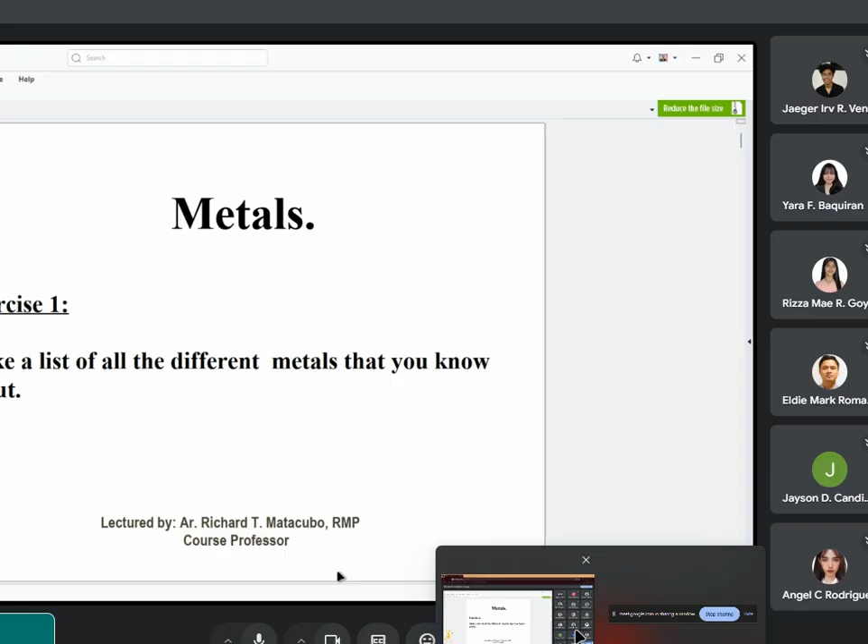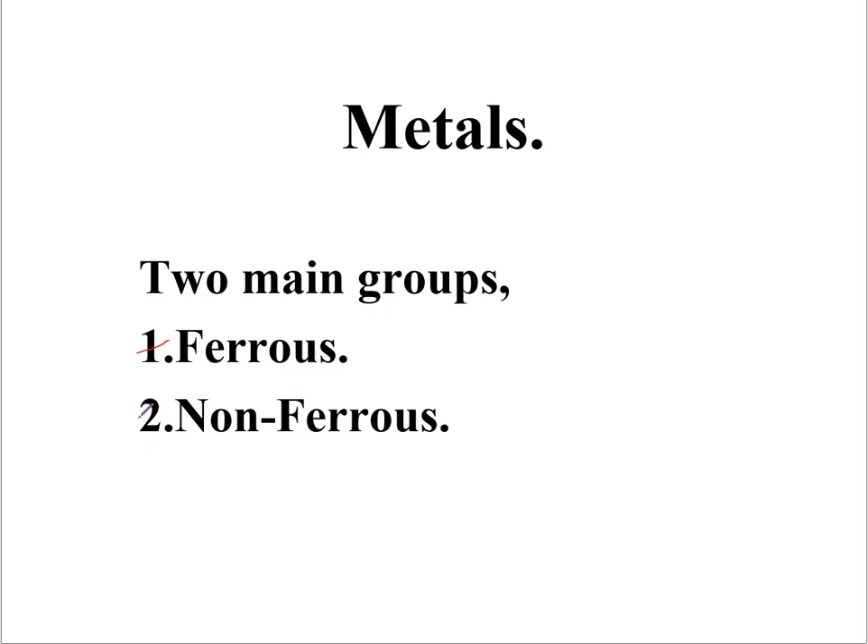Okay, let's start by setting up the information about metals. We have two main groups of metals: ferrous and non-ferrous. Each of these will be discussed one by one. Here is a very comprehensive diagram of compositions of metals.

Sa ferrous, yung pinaka description nun is, or another type of ferrous under its name, is pure ferrous metal and ferrous alloys. Ang example ng mga pure ferrous metals ay iron. At yung mga examples naman dun sa ferrous alloys is steel and high speed steel. So may mga discussion tayo dyan on the succeeding slides later on.

So we go to non-ferrous. We have pure non-ferrous metal as another type, and non-ferrous alloys. So under the pure non-ferrous metal, we have copper and aluminum, zinc and tin, lead and silver, gold and mercury. Take note that mercury is the only non-ferrous metal that is liquid at room temperature.

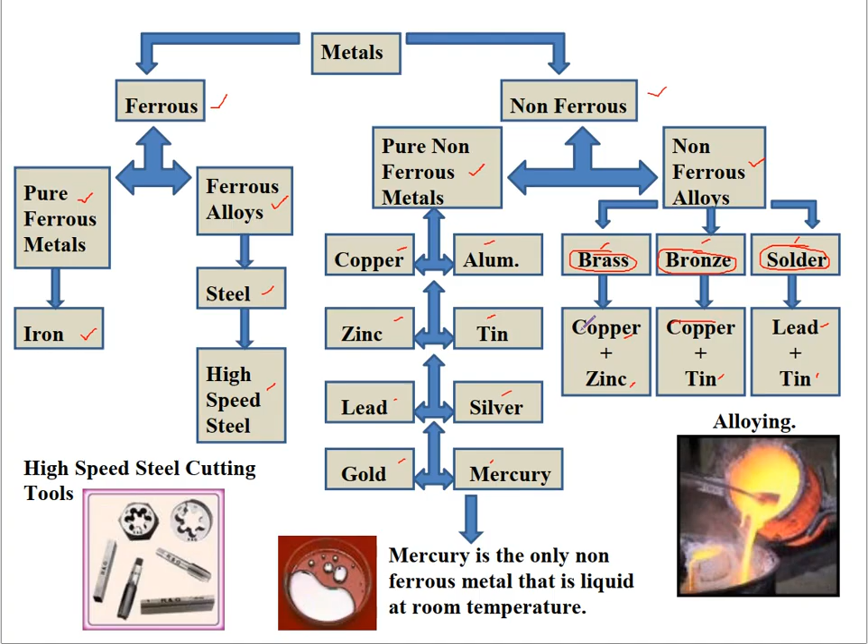Alright, so isa-isahin natin yan. Firstly, we have to define ferrous metals. Ferrous metals are mostly consisting of iron and small amounts of other elements, kasi it's a combination of different elements. Ferrous metals are prone to rusting when exposed to moisture.

So there's a reaction between the moisture and the metal. Ferrous metals can also be picked up by magnets, meaning ferrous metals are magnetic. The rusting and magnetic properties in ferrous metals are both due to iron, because mostly the composition of ferrous metal is iron.

It includes mild steel, cast iron, and steel. So examples are here: mild steel, cast iron, high carbon steel, high speed steel, and stainless steel.

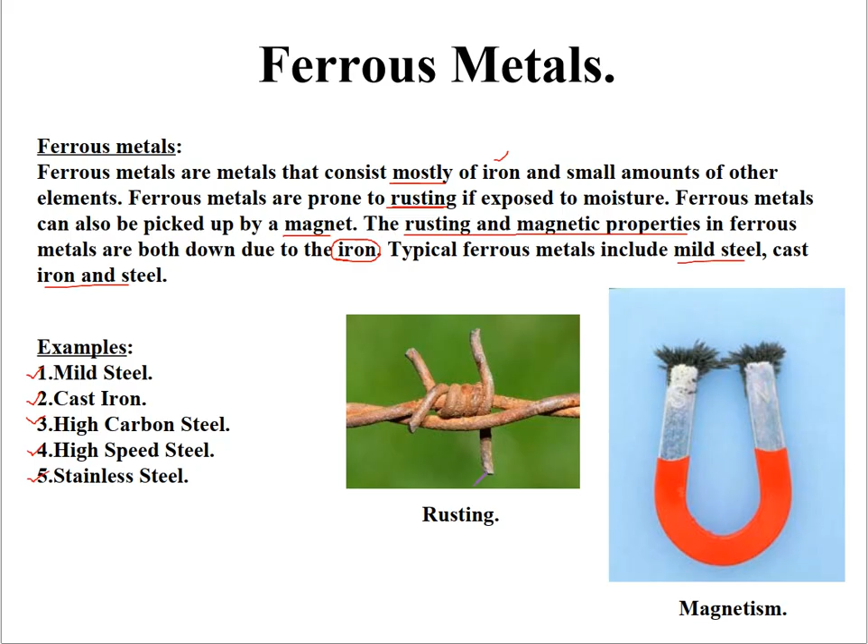So sa mga hindi pa nakakaalam, or probably nadaanan niyo na ito sa high school, rust is the product of rusting, which is the process of degrading a metal due to the reaction of moisture to steel. Ganyan yung itsura niya, yellowish, golden brown, something like that.

So we have different types of metals. Firstly, we have to discuss mild steel. Mild steel has several properties, like ductile and malleable. Pag sinabi nating malleable, you can shape it into something.

Malleable siya, medyo soft property and can be molded into something, especially pag meron kang molder. Mild steel will rust quickly if it is in frequent contact with water. Kaya yung ginagawa natin sa mga mild steel natin is tinitreat natin siya, nilalagyan natin siya ng mga coatings, red oxide, mga automotive paint, yung mga ginagamit natin for anti-rust na chemicals.

So the usage of mild steel includes several things, like nuts, bolts, building girders, yung nakikita nating I-beam at I-column, H-column natin. Yan yung mga mild steel examples natin for building girders, car bodies, gates, and other purposes. The melting point of mild steel is 1,600 degrees Celsius.

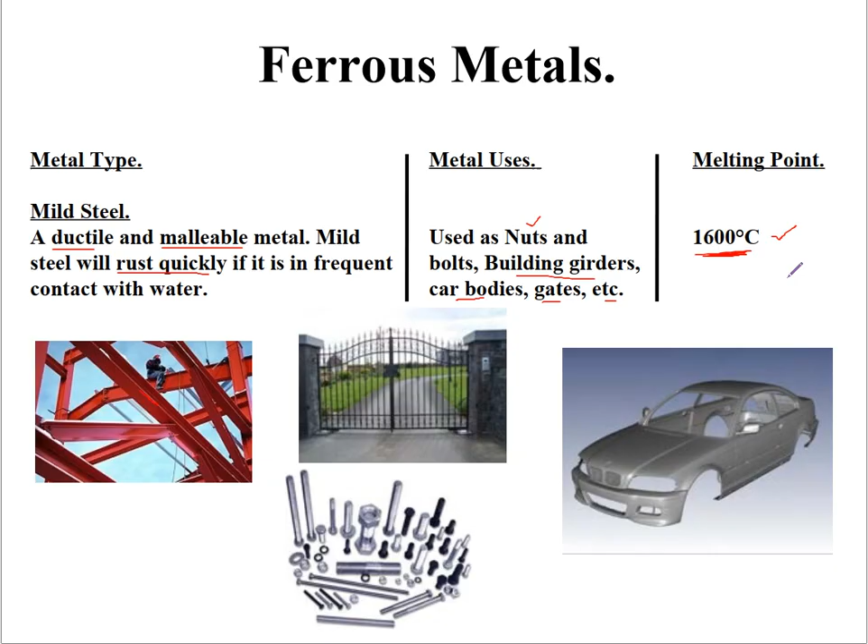Next on our list, we have cast iron. It is a very strong metal when it is in compression, but also very brittle. Pag sa compression siya, if you compress it, di ba dalawa yung forces natin acting in a body? Meron tayong compression and tension, di ba? Yung compression is pinipit-pit, yun, yung iniipit. Yung tension naman is yung hinihila, pahila, na forces. So cast iron is very strong in compression but also very brittle in some other forces.

It consists of 93% iron and 4% carbon plus other elements. Example natin dyan are car brakes, car brake disc, car cylinder, metal works, vices, manhole covers, machinery bases like the pillar drill, and the melting point is 1,200 degrees Celsius. Medyo mababa lang siya dun sa ating mild steel.

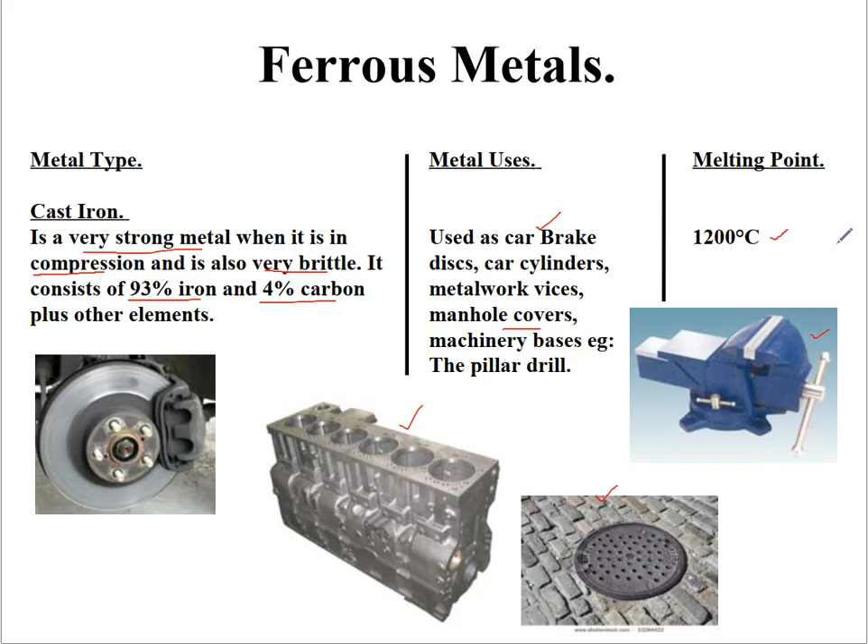Tama, mild steel pala. Next in our list is high carbon steel. High carbon steel is very strong, very hard also, that has a high resistance to abrasion, or yung paulit-ulit na hindi siya striking, kundi abrasion is pagkukuskus sa kanya. So properties is up to 1.5% carbon and very tough.

Kaya ginagamit siya sa mga tools, like for example chisels, screwdrivers, hammers, saw, springs and garden tools. And the melting point is 1,800 degrees, so medyo mataas na yan.

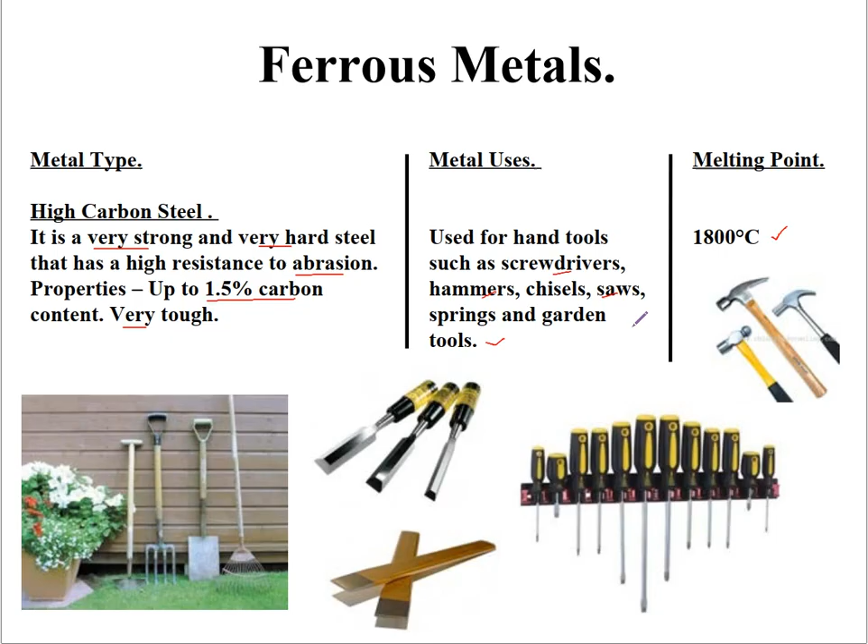High-speed steel, another type of ferrous metal. High-speed steel, or commonly known as HSS, is a metal containing high content of tungsten, chromium, and vanadium combined together, and that combination results in high-speed steel.

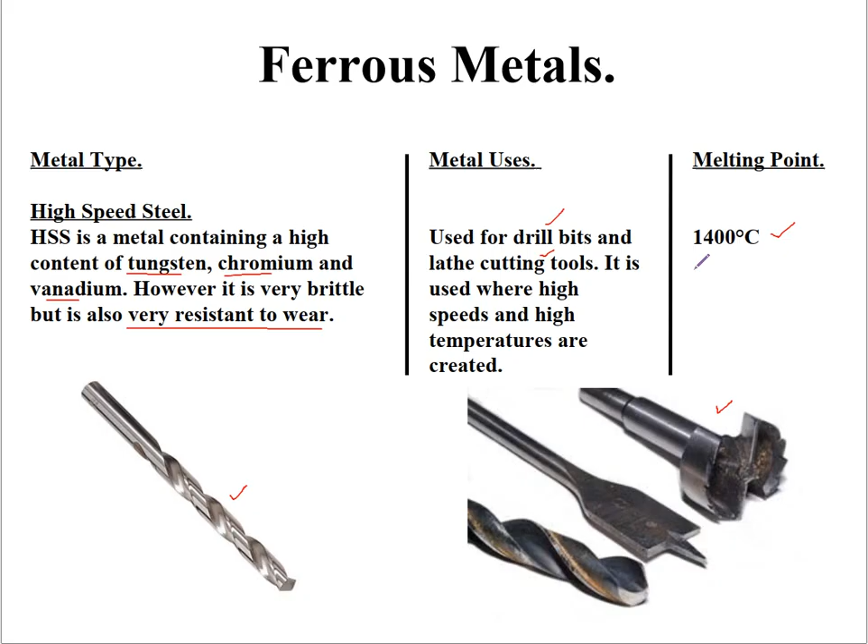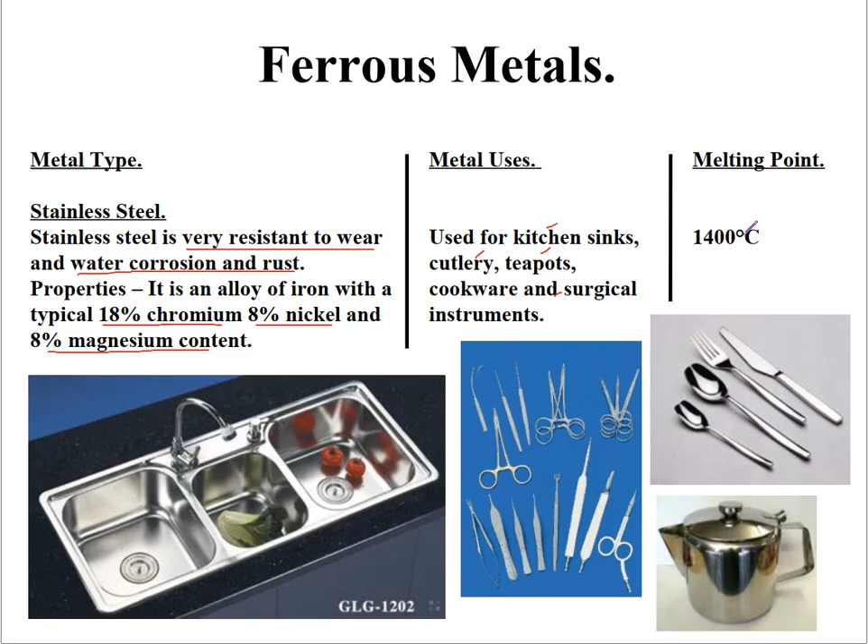Typical properties of stainless steel include 18% chromium, 8% nickel, and 8% magnesium content, with a melting point of 1,400 degrees Celsius.

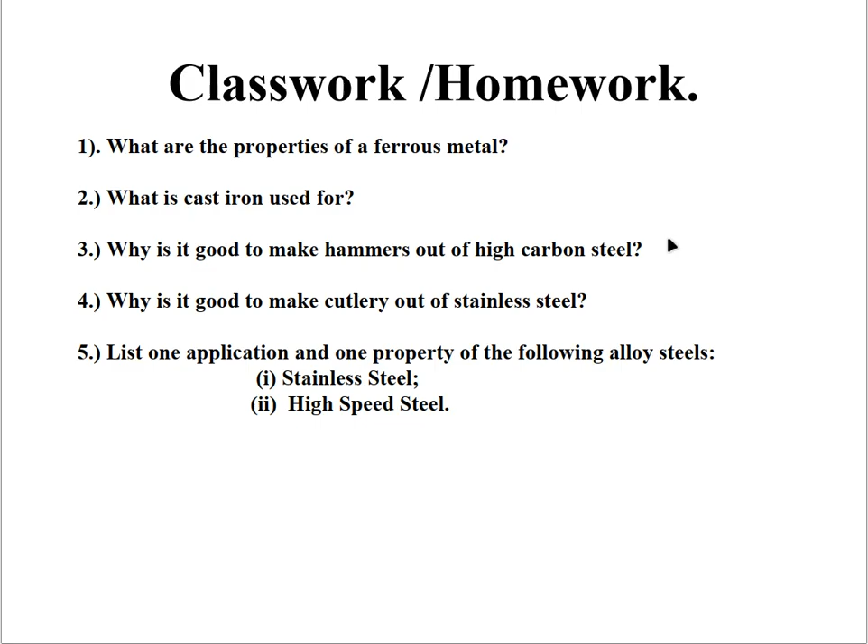But the downside is non-ferrous metal is expensive when used in construction. Still, they can be used if you want a high-end or low maintenance type of metal. It still depends on your application, because if you use non-ferrous metal on a structural member, it's not economical and not reliable.

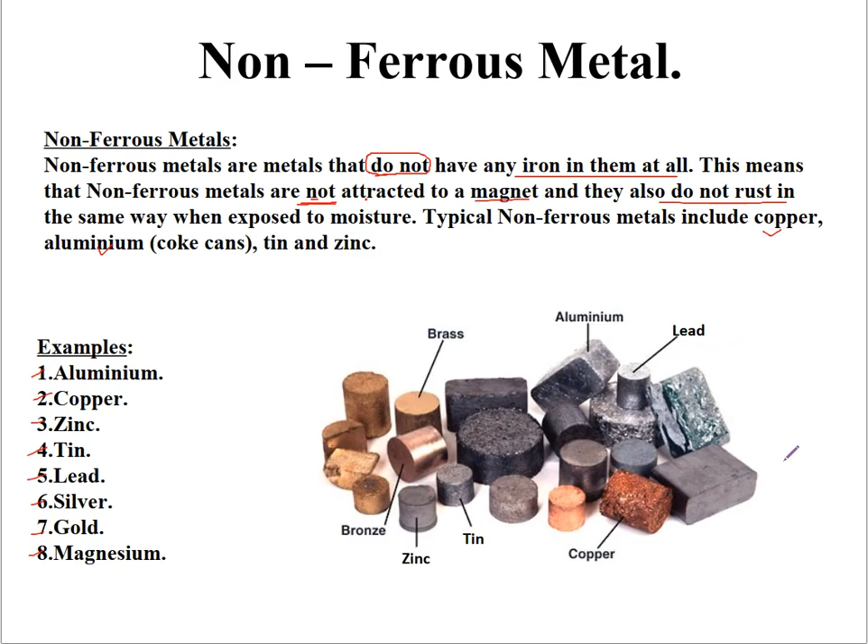So for complete examples: aluminum, copper, zinc, tin, lead, silver, gold, and magnesium. So we have examples here of what our non-ferrous metals look like.

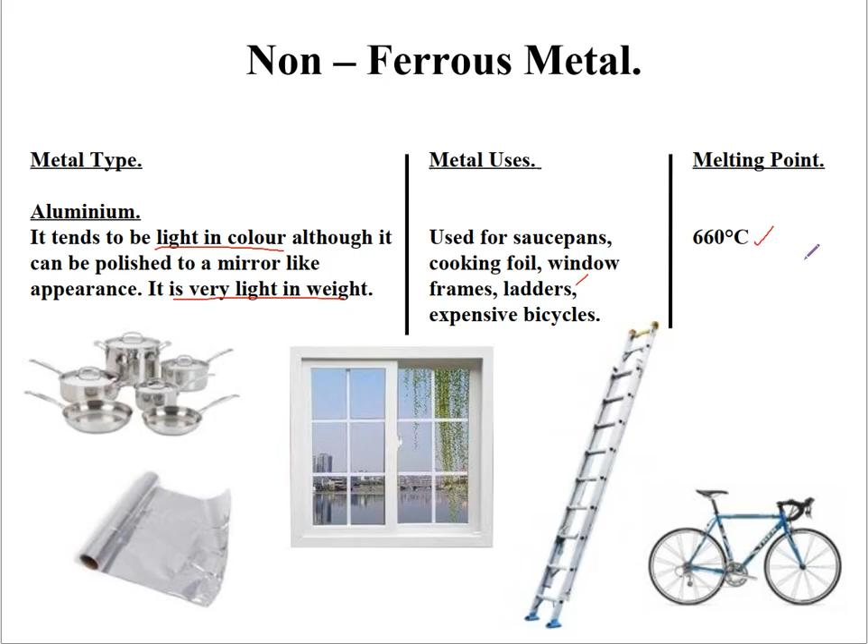First in our list, we have aluminum. Its main physical distinction is it's light in color. We see it in our cookware, cooking foils, window frames, ladders, and expensive bikes, since aluminum is usually lightweight when used on bicycles. It can be polished into a mirror-like appearance and is very light in weight, which is why it's used on bicycles. Melting point is 660 degrees Celsius.

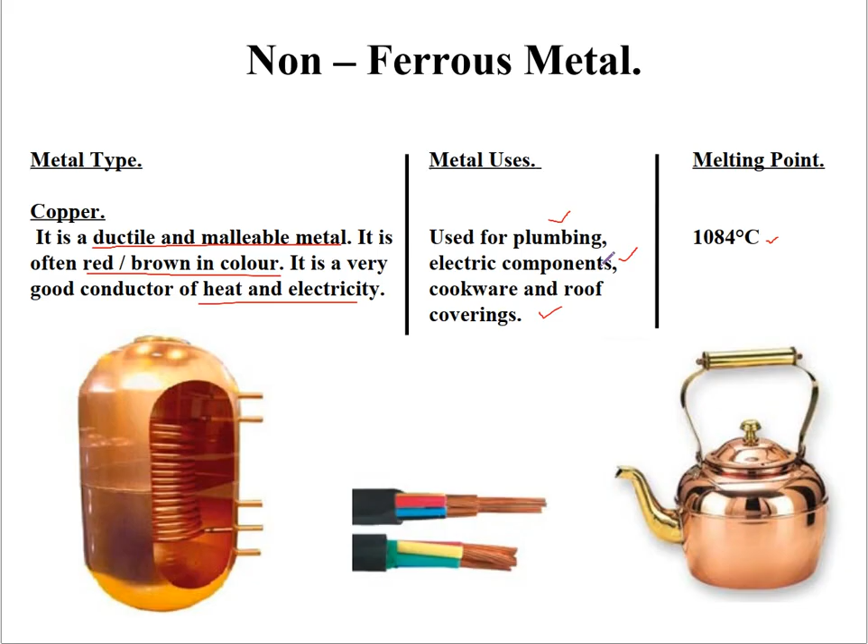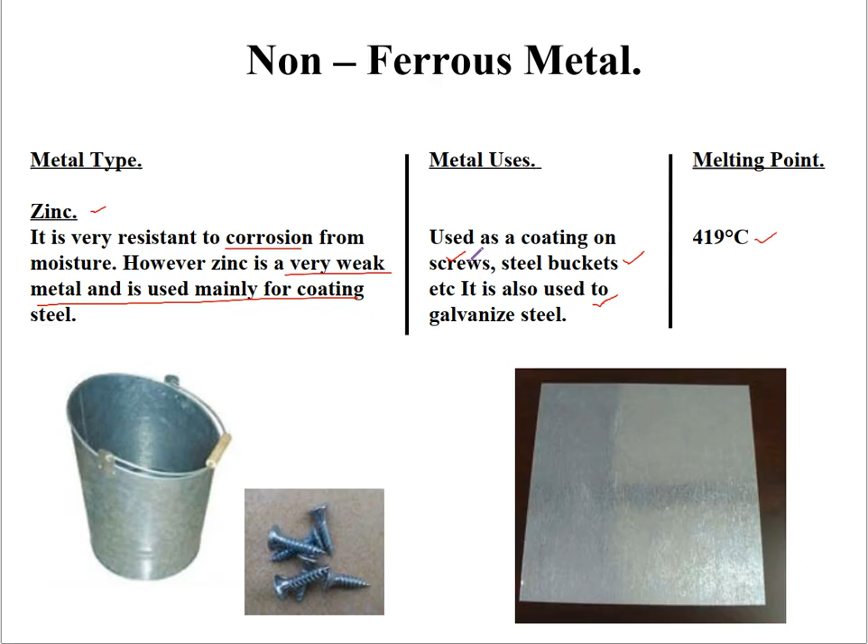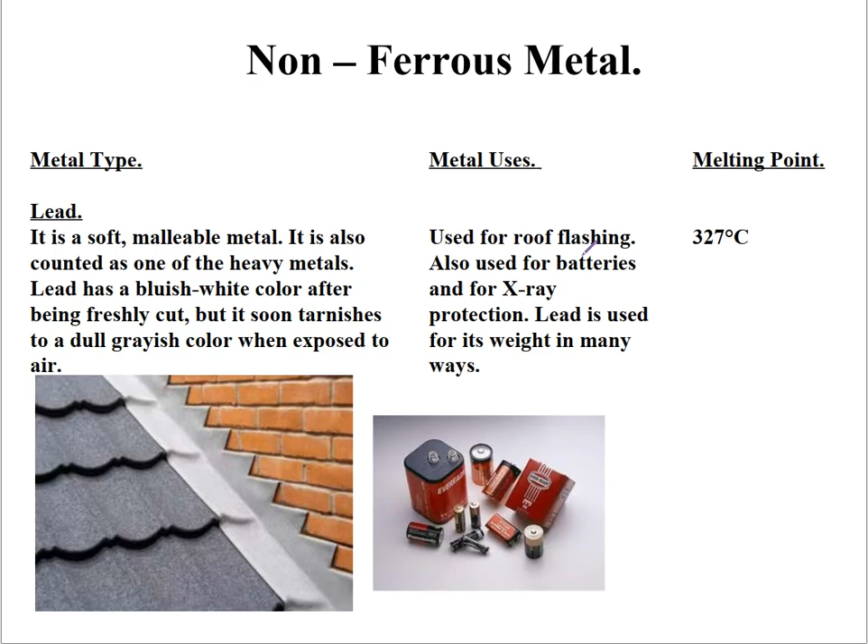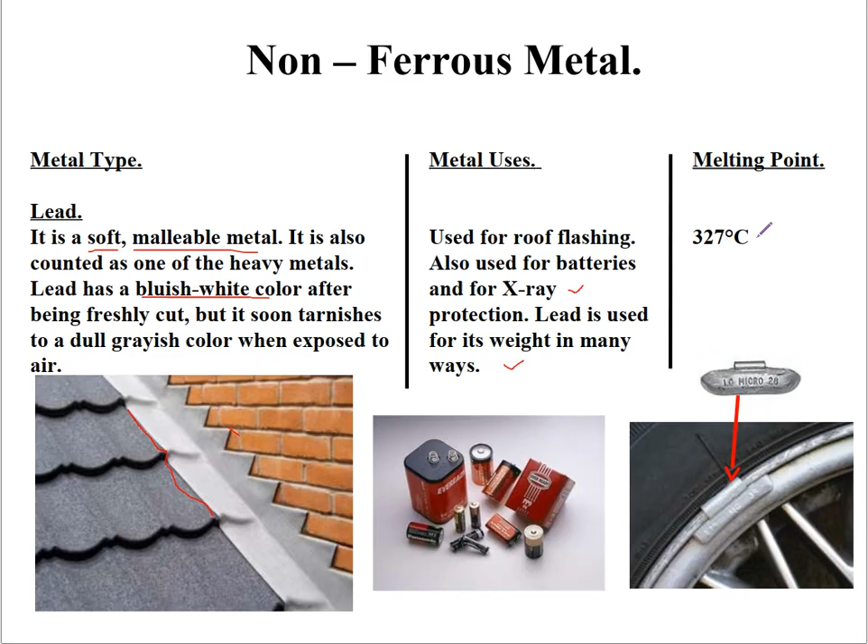Another type of non-ferrous metal is lead. It is soft, malleable, and counted as one of the heavy metals. It has a bluish white color after being freshly cut, but soon tarnishes to a dull grayish color when exposed to air. That's the content of our batteries, and roof flashing, the grayish part that protects against moisture at the connection between the roof and your wall. For batteries and X-ray protection, lead is also used for weight in many ways, like in car tires. Melting point of lead is 327 degrees Celsius.

Another example of non-ferrous metal is silver. Silver is a soft, white, lustrous transition metal. It has the highest electrical conductivity of any element and the highest thermal conductivity of any metal. The metal occurs naturally in pure free form. So why isn't silver used for making electrical wires? One disadvantage is it's very costly, and silver is hard to harvest, which is one reason we don't use it for conventional use. Its usage includes jewelry, high quality cutlery like silver spoons, forks, and knives, currency coins, sports trophies, and it's used in mirrors as a reflective metal.

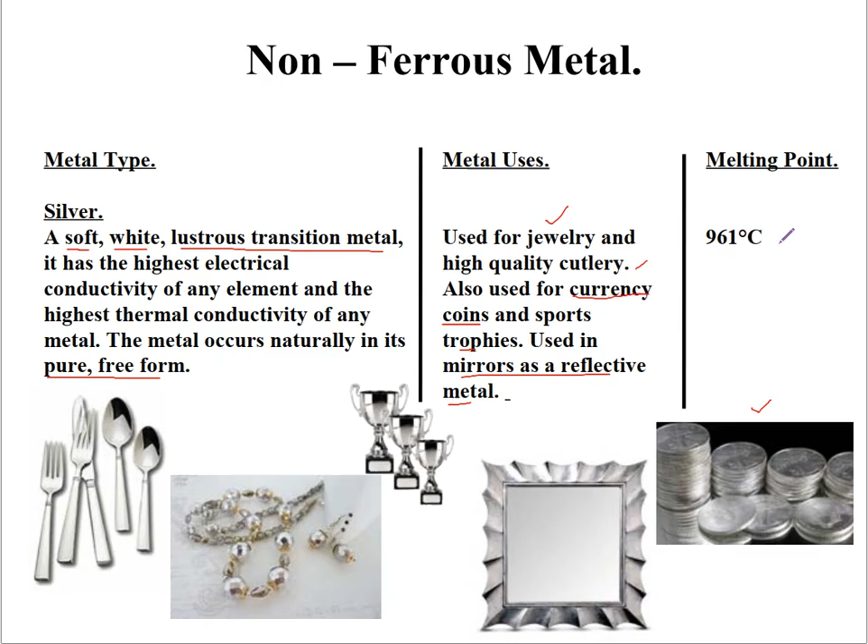Coins, that's also one of its usages. And the melting point for this non-ferrous metal is 961 degrees Celsius.

For gold, gold is a dense, soft, shiny, malleable, ductile metal. Pure gold has a bright yellow color and luster, traditionally considered attractive, which it maintains without oxidizing in air or water. So it stays the same even with oxidation. Gold resists attacks by individual acids but it won't tarnish.

If your gold tarnishes, it's probably fake or has other elements mixed with it. It does not discolor, crumble, or get affected by most solvents. So it's used mainly for jewelry, also for computers as conductors, and for reflective powers to protect satellites, used by outer space satellites.

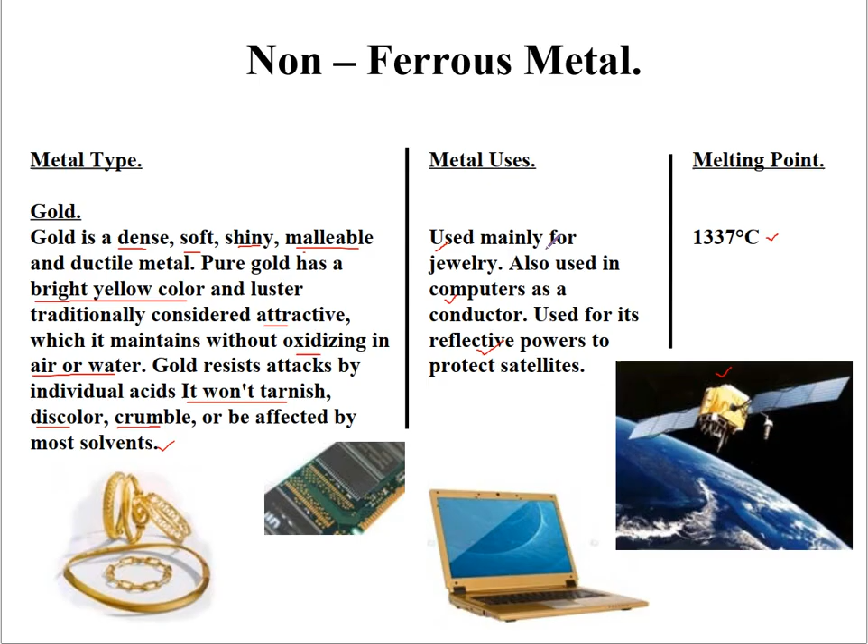And the melting point is 1,337 degrees Celsius. For magnesium, magnesium is a fairly strong, silvery white, lightweight metal, about 1/3 lighter than aluminum, and slightly tarnishes when exposed to air.

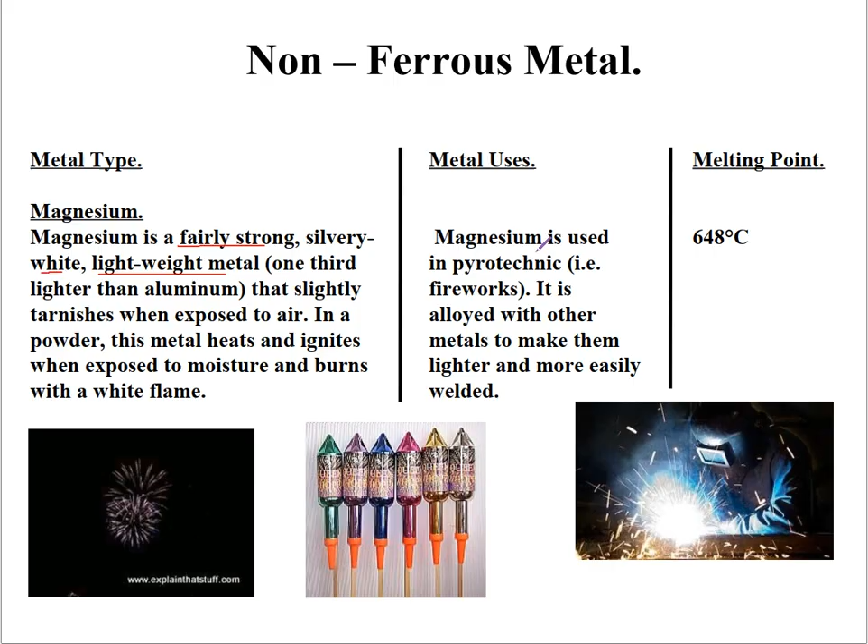In powder form, this metal ignites and explodes with moisture, and burns with white flames. That's why it's mostly used for fireworks displays and also for welding rods. Its melting point is 648 degrees Celsius.

Alright, for another portion of non-ferrous metals, we have non-ferrous metals that are mixed, or a mixture of two or more metals. These are brass, bronze, and solder. They are mixed by being heated in a furnace to form an alloy.

So there's a furnace, or pugon, and it's heated up in order to mix those other elements to form bronze, brass, and solder.

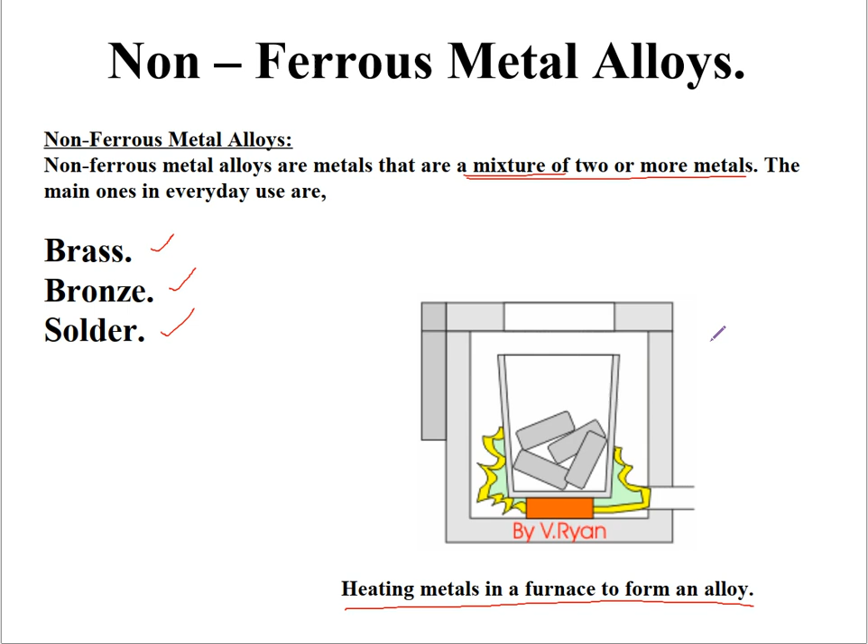This is brass, a mixture of copper and zinc. Copper is the main component, and brass is usually classified as a copper alloy. The color of brass varies from dark reddish brown to light silvery yellow, and brass is stronger and harder than copper, but not as strong or hard as steel.

It's right in the middle. It's easy to form into various shapes, a good conductor of heat, and generally resistant to corrosion from salt water. Examples of this are water fittings, like these brass fittings.

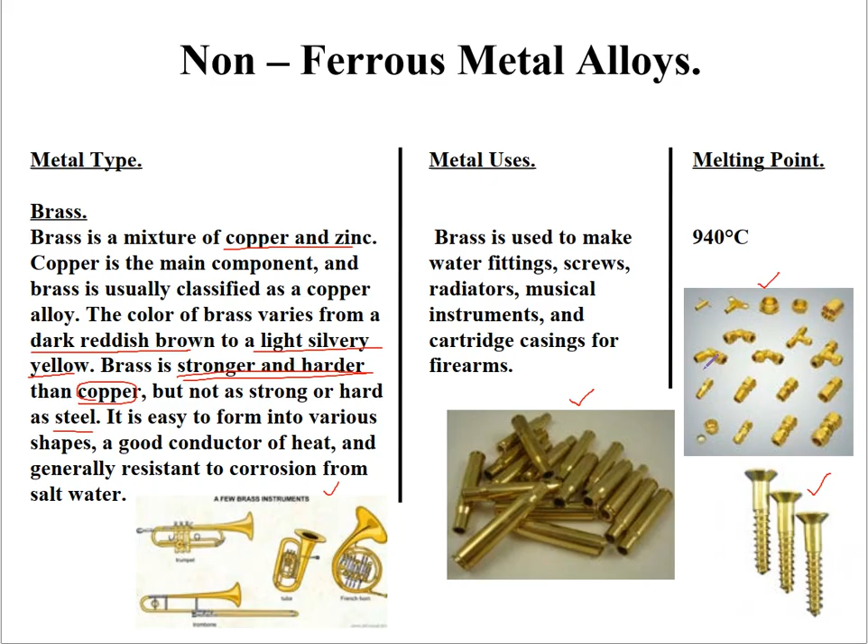Then we also have screws, musical instruments, and cartridge casings for firearms. Melting point is 940 degrees Celsius.

For bronze, bronze is also a non-ferrous metal alloy consisting primarily of copper, usually with tin as the main additive. Copper plus tin, that's our bronze.

It has very high resistance to corrosion, which is why it's used for propellers in our water transportations. It's also used for statues and medals. Melting point is 950 degrees Celsius. However, bronze reacts with acids.

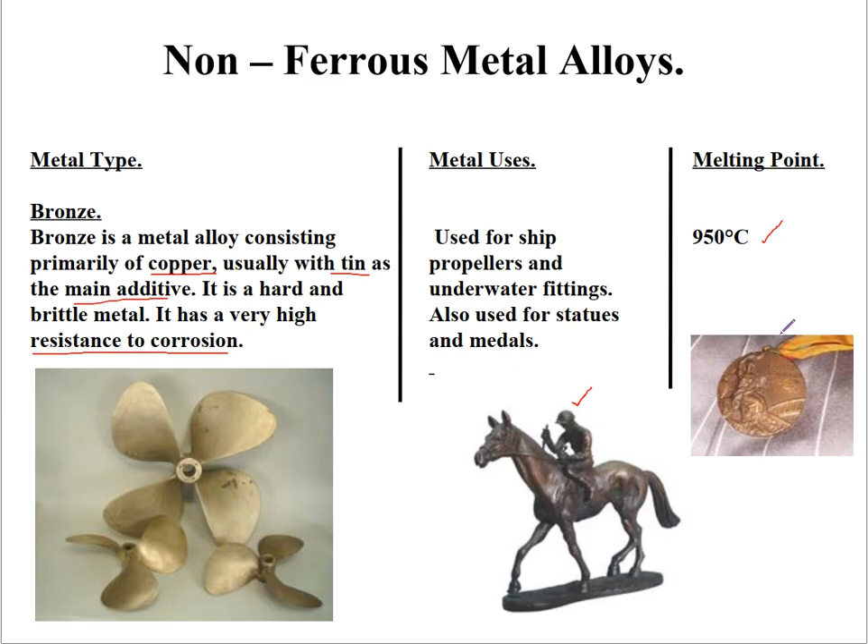That's why it develops a blue-green color discoloration. So it's weak against acid.

Next, we have solder, which is used in electrical works. Solder is a fusible metal alloy used to join together metal workpieces, having a melting point below that of the workpiece. Solder is a combination of lead and tin.

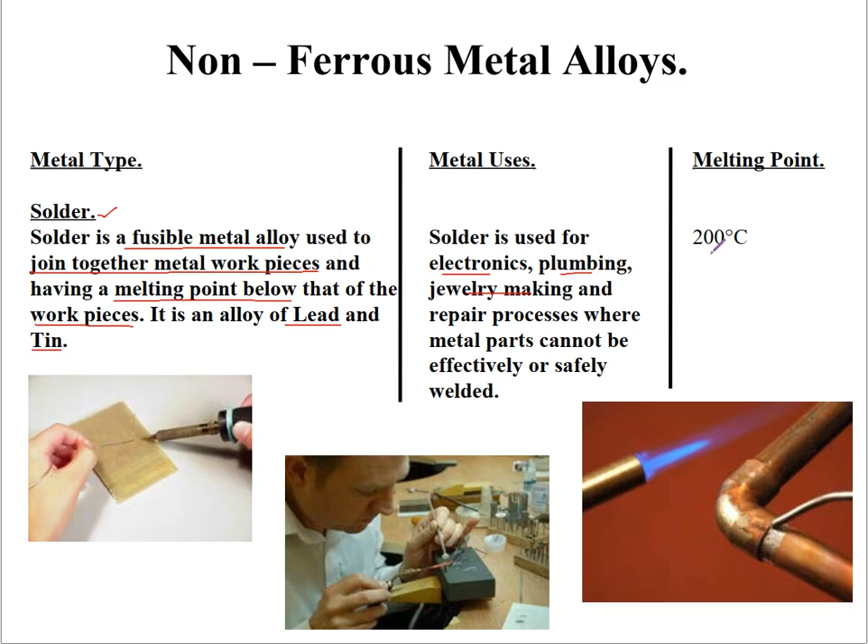Its usage is for electronics, plumbing, jewelry making, and repair processes where metal cannot be effectively or safely welded. Its melting point is 200 degrees Celsius.

Shapes of metals. These are extruded, meaning we press them into shapes. It can be provided in various shapes and sizes. Examples of these are solid round solid - meaning solid from inside out - square solid, hexagonal solid, and angle iron solid, round hollow.

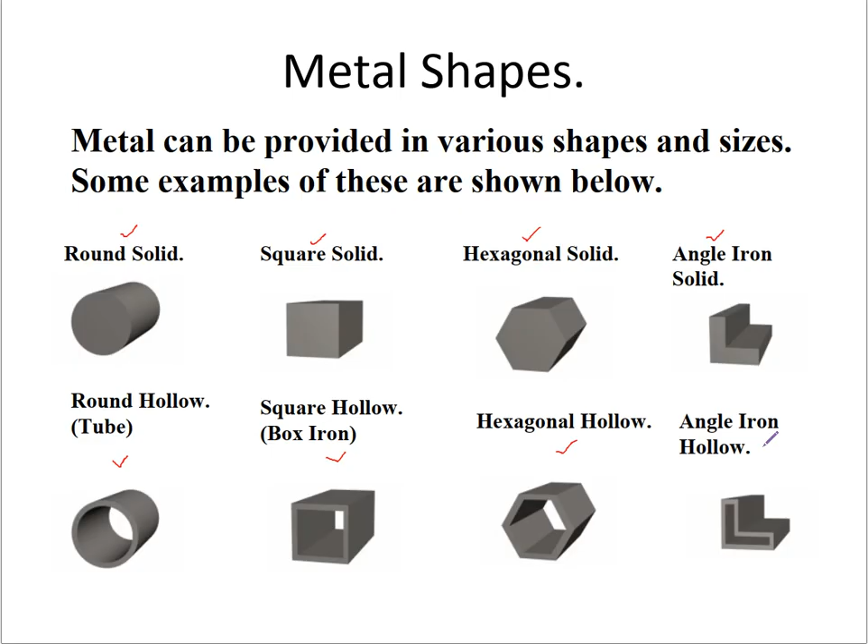Okay, so those are the typical shapes of metals. In everyday use, we can see it in a typical bicycle, which mostly consists of both ferrous and non-ferrous metals.